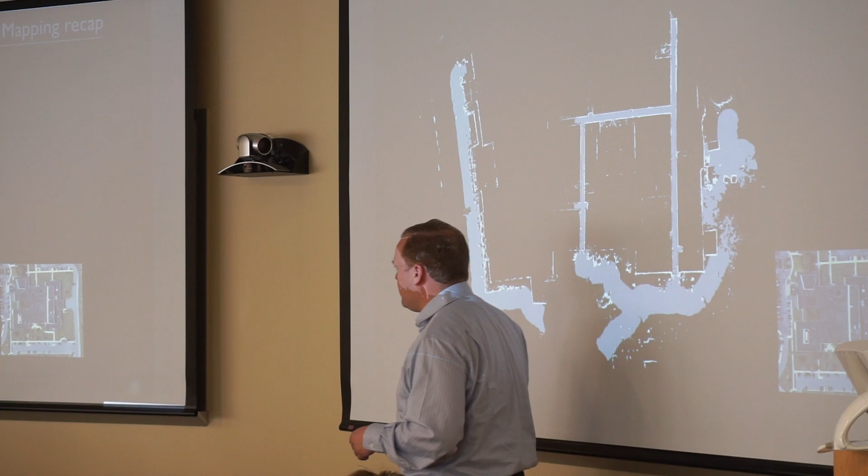This was a team of robots exploring a building here in Ann Arbor. There's about 7 robots. They're sending messages to each other, and it more or less works. They're exploring, filling the space, sending their information back to a command and control center. It's got more than 2 frames per second if you watch it on my laptop, but I guess over here, this is where we're at.

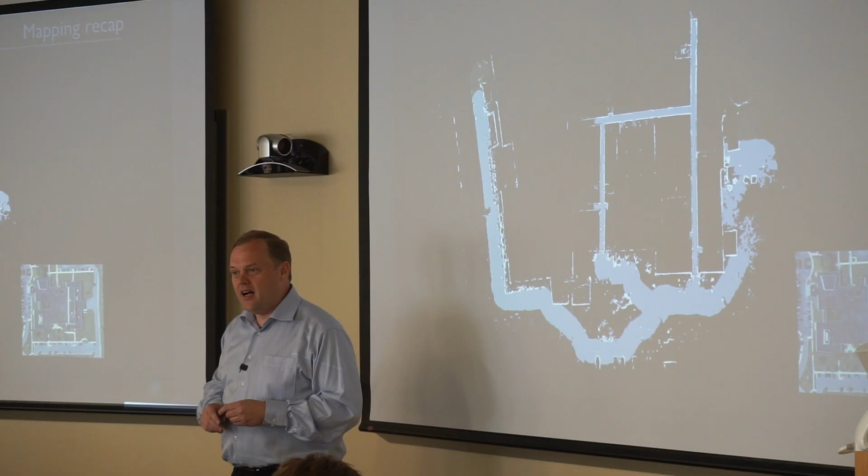But there's all kinds of terrible secrets hidden behind this video that we don't usually talk about, like the gigantic radio system with the base station with a human busily clicking away trying to coordinate all of these robots. We made it work, but it wasn't always pretty, and this was one of the good cases.

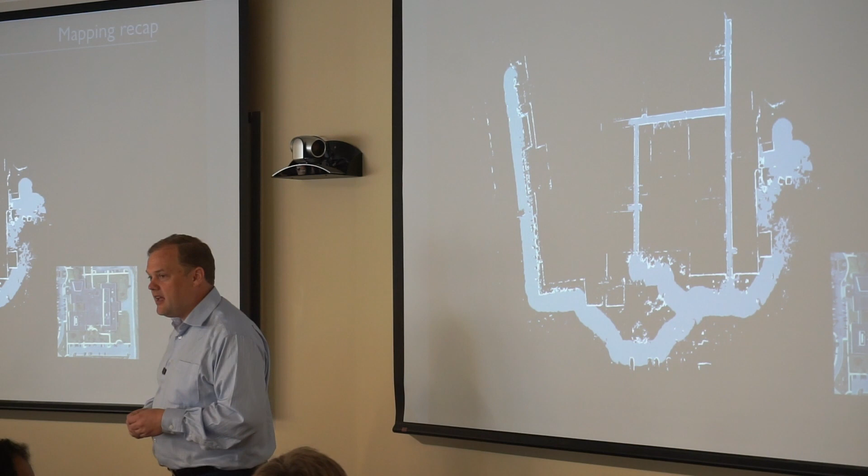So really, this is the motivation for today's talk. How can we build a system where you've got a team of robots that work well together when the environment is at least somewhat unknown and when communications are flaky, and do it in a way that's not going to drive your developers absolutely crazy?

So there's lots of challenges that come up here. Communications limitations are a big one. When I talk about low bandwidth, I'm talking about really low bandwidth - bits per second of data traveling from one robot to the other. If we've got kilobytes, whatever, you can make something work, but bits per second...

Unpredictable lossy networks, that's a huge problem. Your radios could be at the edge of their communications range, or you could have a bad guy jamming your comms. Trying to figure out how to maintain those, make use of what communication resources you have, is actually a really hard problem, especially when sometimes it might be gone entirely for minutes at a time.

And then all the sort of standard computational problems that come up when you've got a team of robots. How do you get a team of robots to plan jointly, to split up the task in an efficient way? When you've got imperfect information, there's a partially observable Markov decision process buried in here. Managing computational complexity, and then trying to make the thing work not just in the environment you started off in, but in a wide variety of environments that you hadn't anticipated.

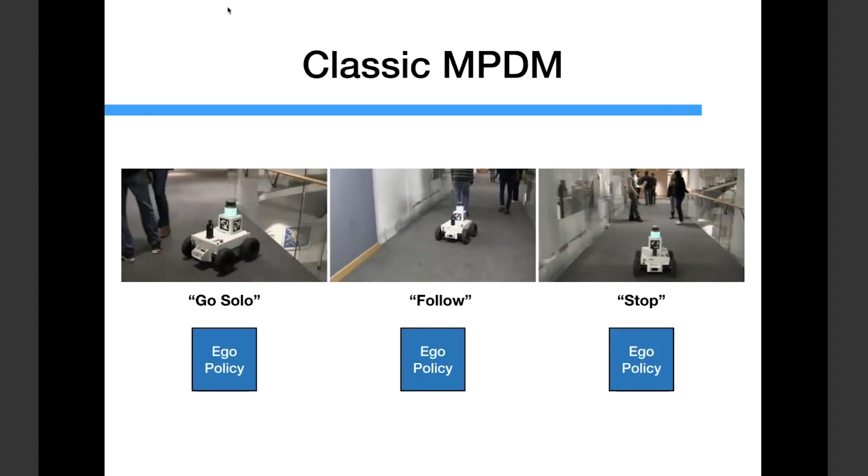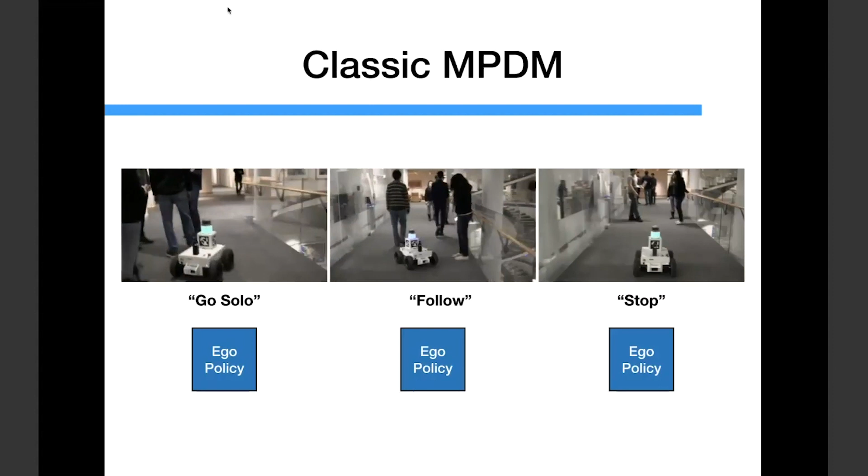The frame rate is making this a little harder to figure out what's going on. Here's the robot that picks an agent and decides to follow it, this guy, and then stop. Oh yeah, see, stopped. It stopped. Ta-da!

So you put these things together, and you get the robot constantly doing these simulations and switching between the repertoire of policies it has available. Each individual policy is really dumb. I sometimes call them idiot savant controllers—they understand how to do one thing, like follow Ben, really well, but they don't actually understand the bigger picture of the different rewards I'm trying to optimize against.

But the simulator just keeps trying them and asks the question: which of these idiot savant controllers tends to do the best for me? And then, hey, that one seems to work out really well—let's use that.

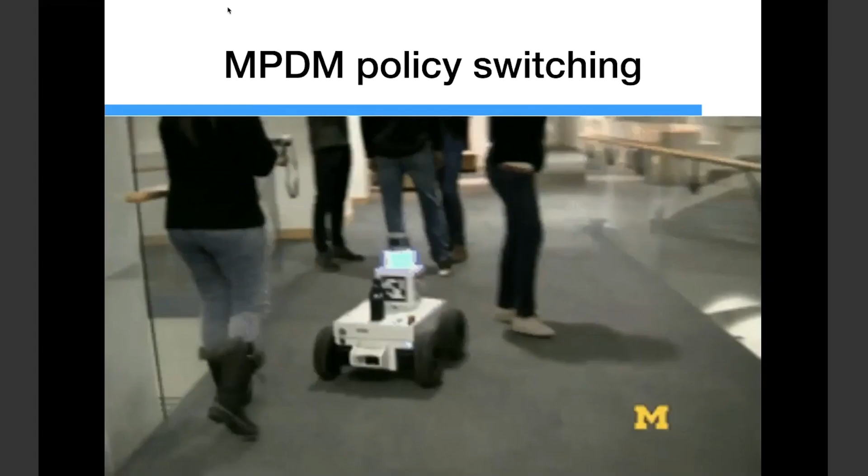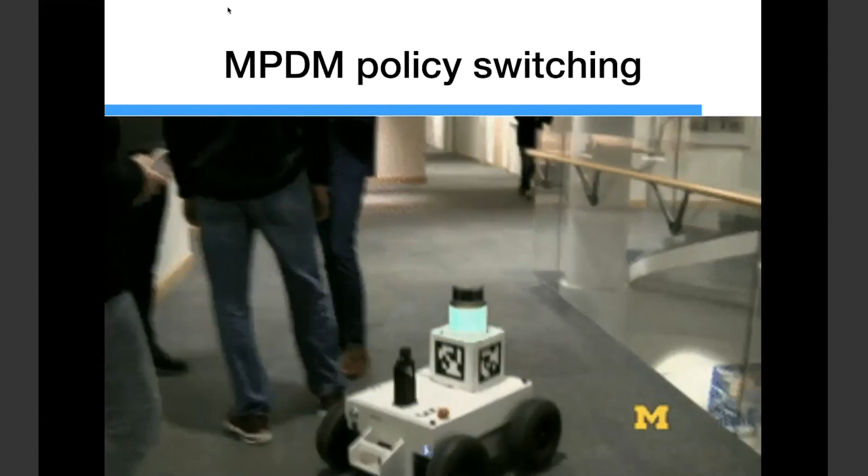The frame rate's making this a little hard, but here you can see it starts off by stopping because basically none of the policies were leading to a good outcome. But then a path opens up, so it goes solo, and as the world opens up, it maneuvers back around those other agents. This makes a lot more sense at more than 2 frames per second.

Here's another example of this. How many of you have been around a robot as it's driving around and thought, this thing's annoying, it's jerky, and it's frustrating? It's not a rhetorical question—let's do hands, right? Robots are annoying.

This is a system that when you interact with it, it feels like a different universe. It's based on multi-policy again, and it's electing a new strategy about twice a second. What you get out of it is not apparent at 2 frames per second, but really smooth behavior—constantly changing what it's doing based on its models and predictions of what other agents are doing, basically peeking 15 seconds into the future using its simulator to figure out which strategy is most likely to not run into people and get the robot where it wants to go.

I can make these videos available offline. For now, you're just going to have to take my word for it—that's silky smooth.

Okay, great. So now you're like, wasn't this talk about communications? Yes, it was. So let's talk about communications.

When you've got multiple robots working together, you get a whole bunch of new interesting problems. There's this theory of mind problem that pops up: what do the other robots know? What would they do with the knowledge that I have? And this makes things really complicated.

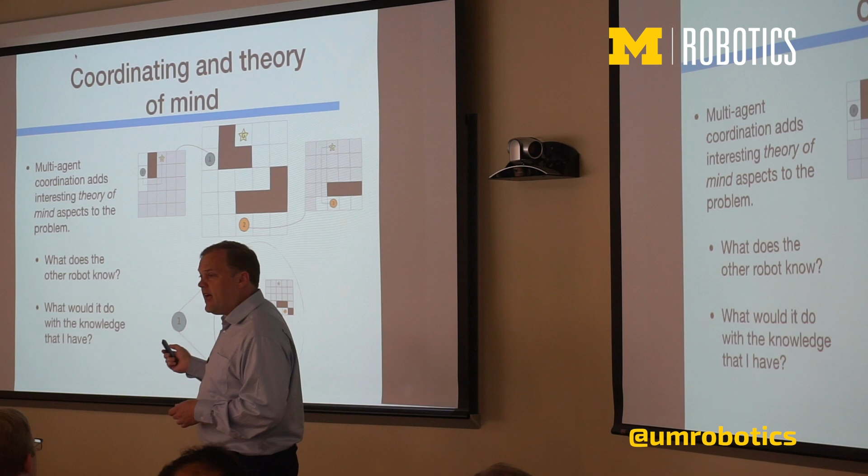Let me describe this figure. This is a simple little grid world. We've got 2 robots—one starts over here, one starts over here. They're both trying to get to the same goal, but they have different beliefs about the world because their sensors have given them different experiences. This robot knows these white cells are open and these are obstacles, and doesn't know anything about this area. And this robot knows these are open and obstacle, and doesn't know anything about this.

So now these robots are trying to work together to figure out what information should be sent to help the other robot get to its target faster. Imagine that you're robot number 2, and you happen to know that robot 1 is here. What do you think? What should you send them?

So again, we're robot number 2. You know robot number 1 is here. You know the goal is here. What's that? Go to it. Yeah, go to it, right?

Do you have any information over here that helps it, that's likely to help it? No, right? You know some stuff over here. And sharing that, you can actually predict that if you told this robot there was stuff over here, it wouldn't change its behavior, right? So what would be the change to robot 1's reward function?

Nothing. So if the change in the reward function is 0, then you shouldn't send anything. That's pretty cool, right? We didn't have to try to figure out what is the reward associated with communication or information gain, which is sort of a proxy for usefulness. We're able to run the simulator and figure out how an exchange of information would actually change the behavior of the system, and how that change in behavior would result in a change to the reward function.

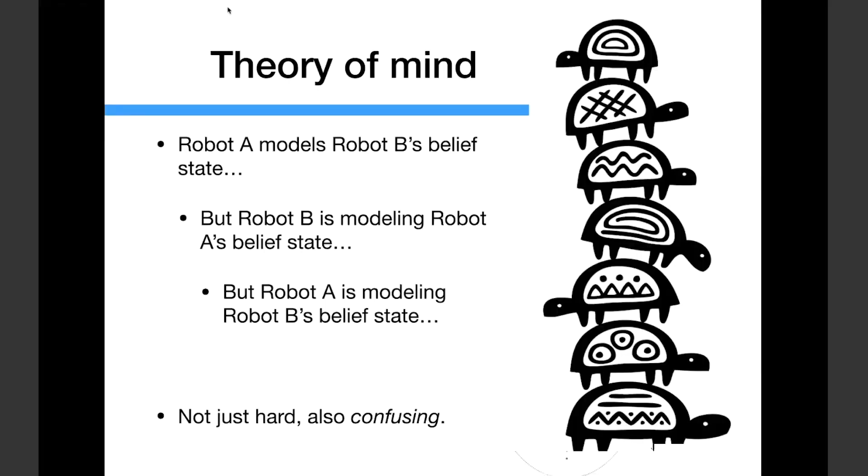Next slide. And so the idea is to come back to multi-policy decision making. We have agents which have some policy. We don't know what the optimal policy is, but we can write down some policies. We can write down how they tend to communicate, what they should communicate. And without trying to figure out what A knows about B that A knows about B's A, we can just try things and see what works out. That's the idea - substitute brute force for hard thinking. As I get older, that sounds more and more appealing.

This particular approach was based on an information gain criterion, right? So it's useful to send information if the receiver finds out something they didn't know before, which, as we just talked about, isn't actually the right thing. It's maybe better than nothing, but what you really want to know is whether transmitting the information gets the job done.

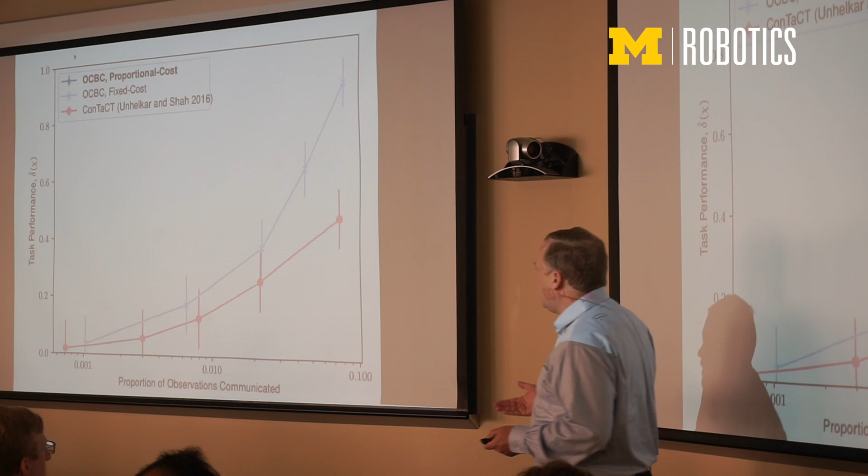The other nice thing about the approach is that we can go a little bit farther. Rather than sending our whole map or not sending our whole map—the baseline method sends the entire map at once, so the decision is do I send everything or do I send nothing—with our approach we can just add more policies that say, what if I shared a fraction of my map? What if I shared just my most recent observation? We can give the robot more choices of what it wants to communicate.

And do we have to change the simulator at all, or the algorithms? No. In the simulation, the robots receive messages that inform their belief state, their behavior changes. They're all scored based on how well that information helps them achieve their objective. It's very easy to extend the system in this way.

And bam, take that, Julie. I like Julie very much.

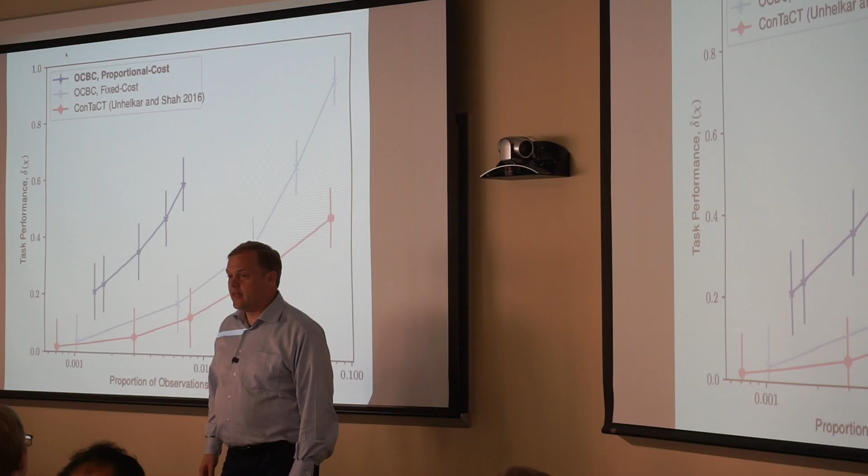But we do really well. So lots lower communication, and we're much higher task performance.

Now the funny thing is, I'm 20 minutes into the talk and I haven't actually gotten to what we're doing on this ARC project. So we're building up to it, but we're almost there.

The problem with this is that planning on the individual granularity of which grid cells am I going to share information about is incredibly expensive. We've just made a massive computational trade-off. Sure, we save a lot of bandwidth, but our CPU is just running on these simulators, marginalizing over all of our uncertainty about the world. So this limits the kinds of problems that we can solve.

And if you noticed on the previous slide, you've got a 4x4 grid world, which Ben's smiling right now. Like, 4x4 grid world's like, enough with the 4x4 grid worlds.

So the question—this is the ARC proposal, what we're working on now—is how do we solve longer horizon problems using these kinds of methods?

So if the original multi-policy is essentially selecting control laws that are outputting motor outputs and individual messages to send, making decisions on the scale of 100 milliseconds with a planning horizon of 10 seconds, how do we get to something that looks more like...

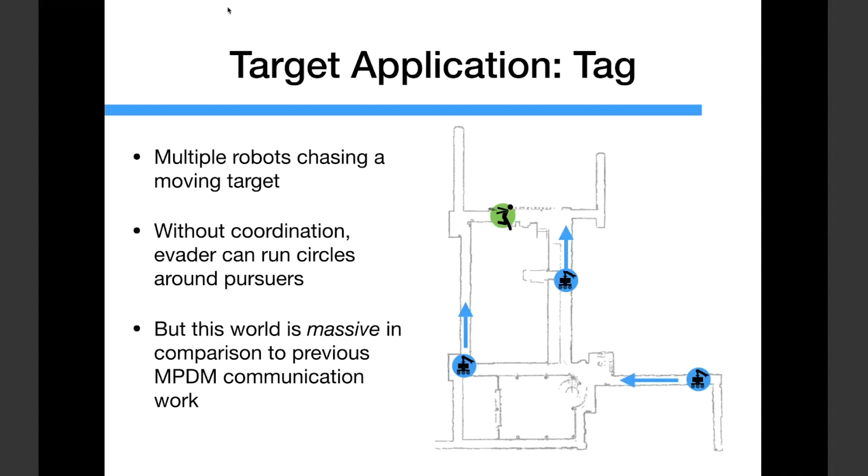This world, though, is massive in comparison to a 4x4 grid world. Now, we're still going to abstract a bunch of this away to make it more computationally feasible, but now we're scaling this up to something that starts to look and smell like a real environment, which is exciting because I like robots.

So here's our abstraction. Here's the real world environment. We build a graph version of that world. Evaders get yellow dots and robots get blue dots. And so if you're noticing a Pac-Man theme, strap yourself in—there's more coming.

So one of the big questions is, if we're going to build a simulator that allows us to make predictions, how do we model the behavior of the Pac-Man, the evader? There's lots of ways of doing this, and we've run the gamut of really complicated, fancy methods.

In this case, we're using something relatively simple: you've basically got someone loitering in the building, and if they see you coming, they go the other direction. Otherwise, if you're not bothering them, they're content to sit on their butt, or they move randomly and stroll around. Not especially smart, but you could have that on a military base, where you've got a bad guy who's snooping around, trying to duck away from other folks.

So now the question is, what are the policies that we're going to allow our robots, the chasers, to follow? How many of you actually know a lot about the Pac-Man AIs?

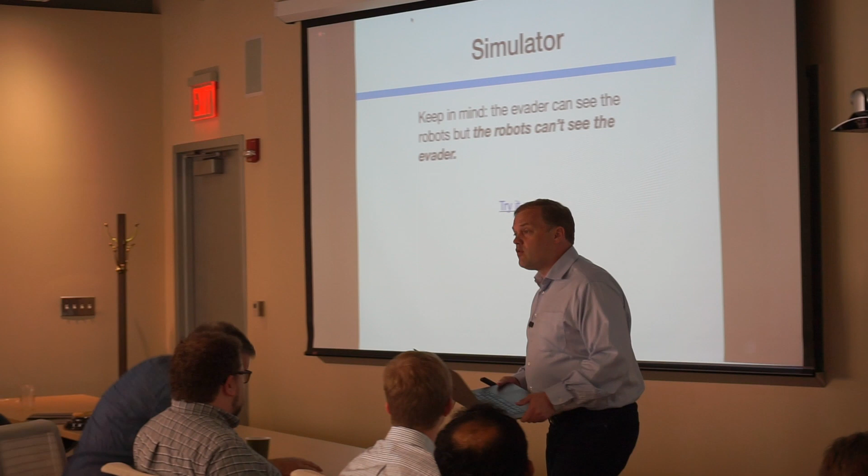No hands? All right, fantastic. Keep in mind, I'll bring the laptop to you. You're good. Keep in mind that the evader knows where the robots are — the bad guy, the Pac-Man, can see where the ghosts are, but the ghosts cannot see the evader. So I'll do this, and then do this — there's almost enough contrast to see what's going on. So if you use the arrow keys — if it's not working, I might need to just hit reload. I'll just reload, because, internet. Try it again.

Okay, good, it's working. So he's driving around with the arrow keys, controlling the yellow guy. And the blue guys are deciding on a macroscopic coordination policy, either belief gobbling or this random hallway selection. The thing is, neither of these policies are particularly good, but the simulator gives them both power — they both behave differently, and so being able to pick the better of the two policies, even if both are pretty dumb, makes them not so terrible.

Keep in mind, the blue guys can't actually see the yellow guys. Oops, we can scroll so that you can see where you are. I can't, apparently, but we're good. All right, you get the idea.

57 is actually quite good. So yay! But you get kind of the dynamics, right? So the blue guys, the good guys, are simulating what might happen over the next 100 steps or so, trying different strategies out. None of those strategies are particularly good, but we can see what happens as we switch back and forth between them. And there we saw anecdotally.

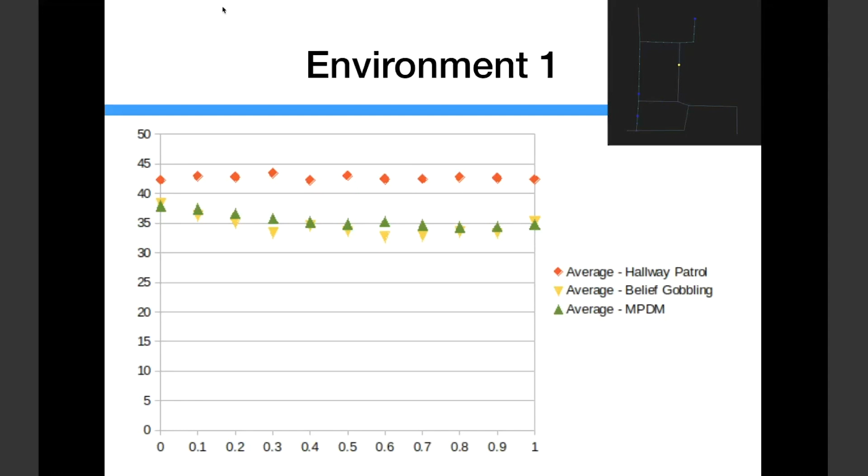All right, next slide. So that environment that we were just in was actually pretty simple because there weren't that many loops. Here's another environment which looks like a grid world, but topologically, this represents a much more complicated environment. All these loops make a lot more space for you and your nephew to kind of chase around the table.

Because it gets to change, yeah. So it gets to change back and forth. Depending on what the exact current estimate of where the bad guy is, MPDM is dynamically switching between these policies. And so even though, on average, belief gobbling kind of sucks, sometimes belief gobbling is just the thing to capture the bad guy. We didn't design it that way, but sometimes that happens to be the case. The different behavior that you get from that happens to be a good choice. That's pretty cool. I like it.

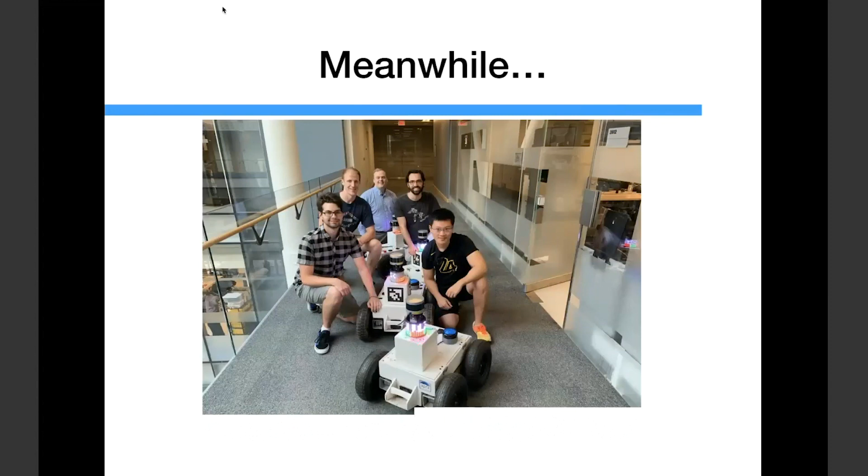And meanwhile, Cameron's back there, one of our undergrads over the summer, helped us refurbish 4 of our large robots. And now we have 4 robots that are ready to go and do this. Stay tuned — pretty soon in Bob and Betty Beyster building, you may be running for your lives from teams of robots that are conspiring to capture you, which would be a lot of fun, wouldn't it? That's it. Thank you.